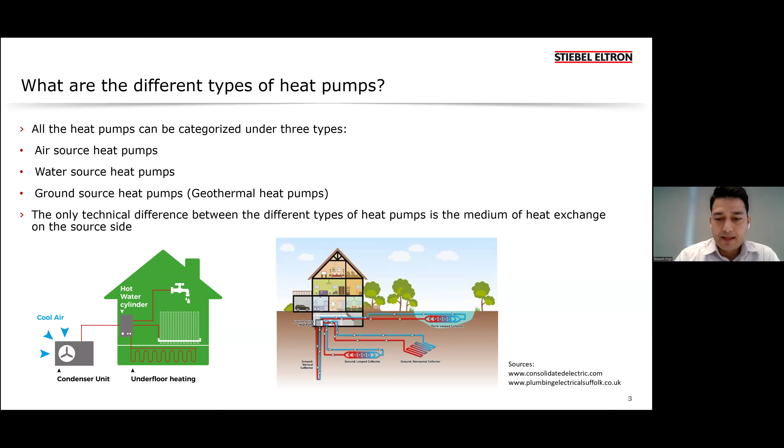That's only the technical difference between them. The refrigerant cycle, we'll talk about it a bit later, is exactly the same, and those are the only differences.

So the most common heat pump we see, including our high wall heat pump, famous in New Zealand, or hot water heat pumps, these are all types of air sourced heat pumps. These air source heat pumps basically come in two designs: one we call a monoblock heat pump, and the other is called a split heat pump.

So the monoblock heat pump is a heat pump where we've got all the components, we'll talk about the different components a bit later, all in one body. It's basically comprised in one body, hence the name monoblock system.

And a split system, as the name suggests, is split, so those components are split into different parts. If you imagine a high wall heat pump that most of you probably have in your homes, in a lounge or bedroom, those have two components. One part is outside, that's the fan unit, the compressor, and the evaporator. There's a refrigerant line running between the outdoor unit and the indoor unit. The indoor part, the fan coil part, blows out hot or cold air - that is the condenser. So it's basically split between inside and outside, hence the name split units.

Of course, it offers flexibility, so you can actually place that indoor unit wherever you want. But of course, you need a refrigeration professional to install that system. So in air source heat pumps, there are two types: monoblock and split systems.

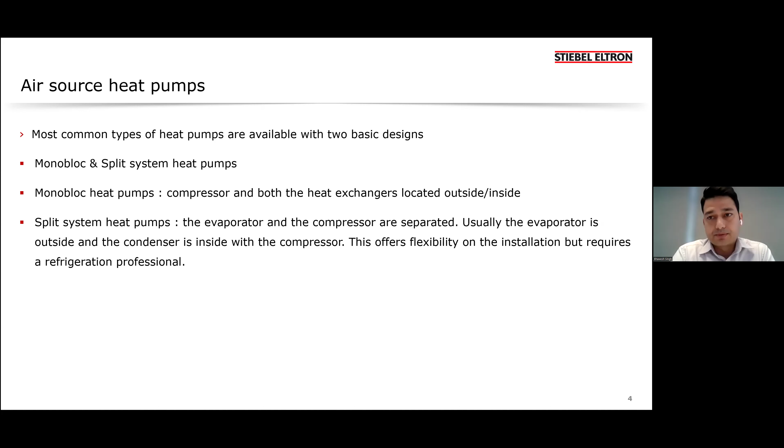Moving on with the heat pump - so what is actually a heat pump? As the name suggests, a heat pump is actually a pump.

It's a pump that moves environmental energy from one place to another. So in this case, it basically moves the heat rather than creating it. As we know from thermodynamics, you cannot create energy nor destroy it - you're basically moving it from one place to another. What the heat pump does is move the energy counter to the direction of normal flow. Normally energy moves from warm to cold, so in this case the heat pump does work to move the energy counter, from cold to hot - moving from cold outdoors in winter, to move the heat inside the house.

It's named pump because most heat pumps also have what we call the reversing valve, so you can use that in summer for a cooling mode. The same heat pump works in winter for heating, and with the reversing valve, we can use that heat pump to switch to cooling in summer. Most heat pumps work over a range of temperatures, anywhere between -20 and +40 degrees, which makes them useful in most parts of the world.

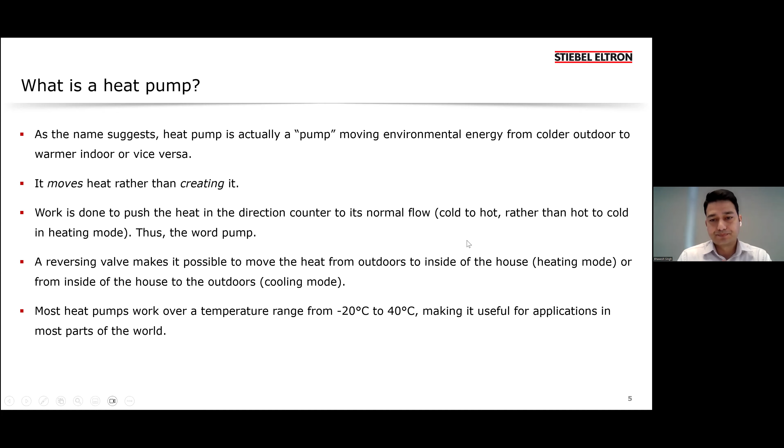So how does the heat pump work? A heat pump is nothing more than a refrigerator, actually - it works exactly like a refrigerator. As a matter of fact, refrigerators and air conditioners are examples of heat pumps just running in cooling mode. If you imagine a refrigerator, you've got your food inside. The refrigerant cycle extracts energy from that food, thereby cooling it down, and dumps it at the back of the refrigerator. You've got a little fan at the back of the refrigerator, which is warmer than the inside, so it basically gets the energy from inside and dumps it at the back.

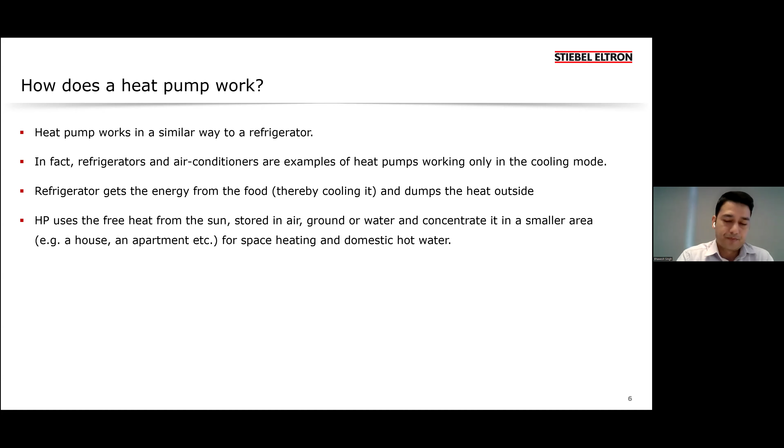So the heat pump basically uses the free heat from the sun, which is stored in air, ground, or water, and concentrates it in a smaller area - the apartment or house - for space heating and domestic hot water. So that's a little bit about heat pumps.

This could be a bit technical, but I'll try my best to explain it to you. This is the main part of the heat pump - as you can see, there are four components: the evaporator, compressor, condenser, and expansion valve. It's basically a hermetically sealed cycle.

Inside this hermetically sealed cycle, what we have is refrigerant flowing. This refrigerant has one really special characteristic: it boils at extremely low temperature. For example, we know water boils at 100 degrees Celsius. We've got refrigerant like R134A in some of our hot water heat pumps that boil at -26 degrees, and we've got 410A, which boils at -48 degrees, so extremely low boiling point.

So what then happens is any temperature we get here, especially in New Zealand, even Queenstown, if -6 degrees comes here, the refrigerant starts boiling. As the refrigerant boils, it makes its way to the compressor, which gets the evaporated or vapor refrigerant and compresses it, thereby increasing the pressure and temperature.

So then that hot gas goes into the condenser, where we have colder water coming from one side, and that becomes way hot on the way out. That can be used for heating systems, potable hot water heating, pool heating, spa heating, anything you want. So that energy is given out here, and then the refrigerant makes its way to the expansion valve.

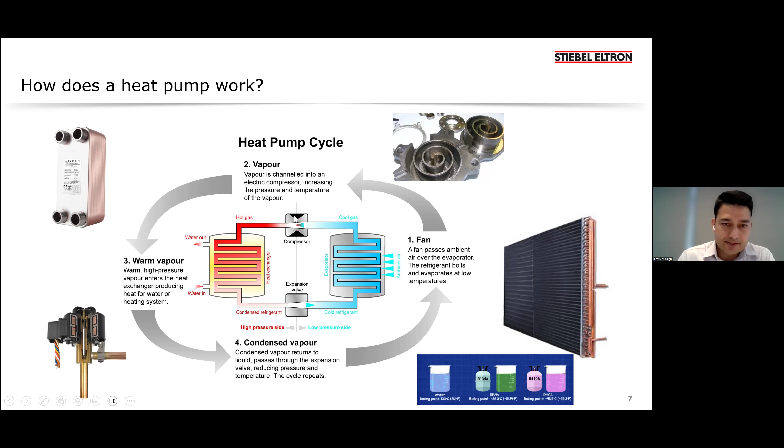So if you look at it that way, why is it that the heat pump is so efficient? You can see that most of the energy we receive from air, groundwater, or ground is about 75 to 80% energy. That's basically quote unquote free energy for us, and only about 20 to 25% is required for electricity.

The good thing is you can actually even produce that or part of that electricity yourself with solar PV or wind turbine or the rest of it. So you've got about 75 to 80% of the environmental energy, plus 20 to 25% of the electrical energy, to make into 100% heating system.

So if you calculate the coefficient of performance, or COP, the efficiency of the heat pump is the heat output given out here, 100%, divided by the work input, how much you put in here, 25%, which gives you your COP of 4, or 400% more efficient than just using an electrical element.

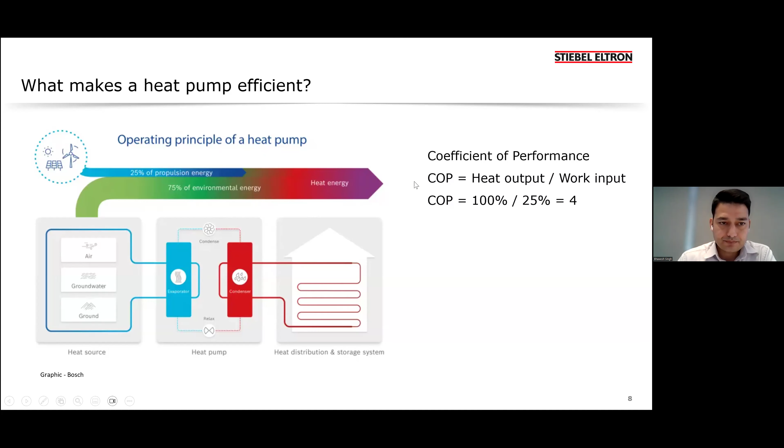So the heat pump, as briefly mentioned before, can be used in summer for cooling. That means it just changes the evaporator and condenser parts. You're basically extracting the energy from your indoors, thereby cooling it down, and dumping the energy outside. In winter, it extracts the energy from the ambient air and dumps it inside, thereby heating the house. The same heat pump can be reversed to heat and cool the space.

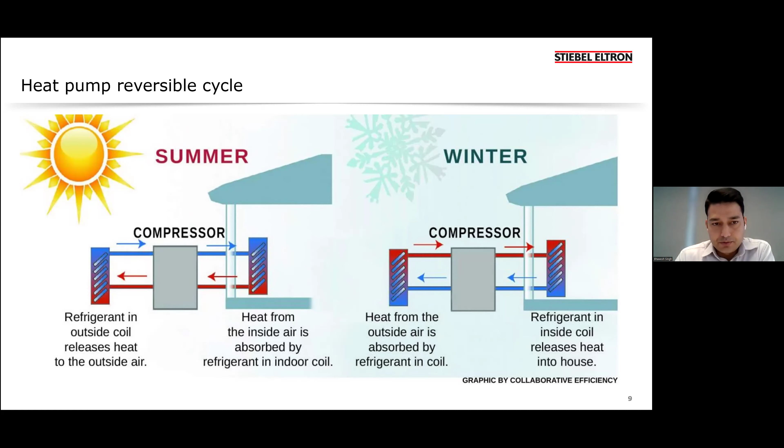A slight product overview of heat pumps that we have and that can be used. So three heat pumps on the left - you can see those heat pumps can be used for space heating, hot water heating, pool heating, spa heating, depending on the size of your building.

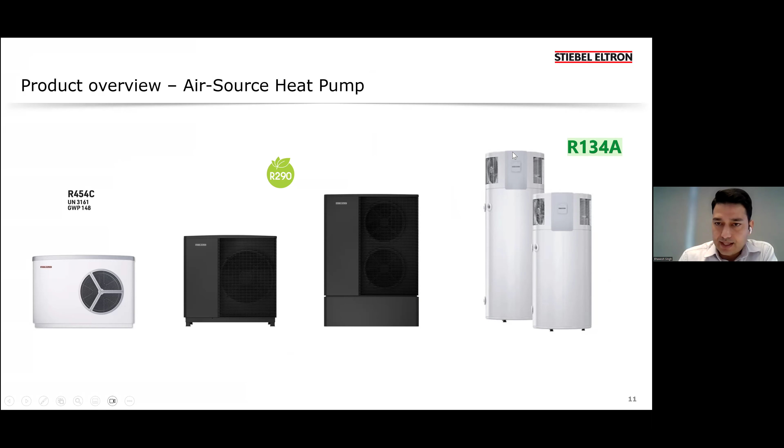And these ones here are just hot water heat pumps. You can see here a hot water cylinder with the heat pump on top, which has got a really smaller compressor of only about 500 watt. Hence it's quite efficient, and that basically heats up the tank to produce potable hot water.

We also have ground source heat pumps, basically similar size. We don't need a fan here because we're extracting the energy from the ground source or water source, in the size of 4 kilowatt to 90 kilowatt for residential purposes and semi-commercial purposes.

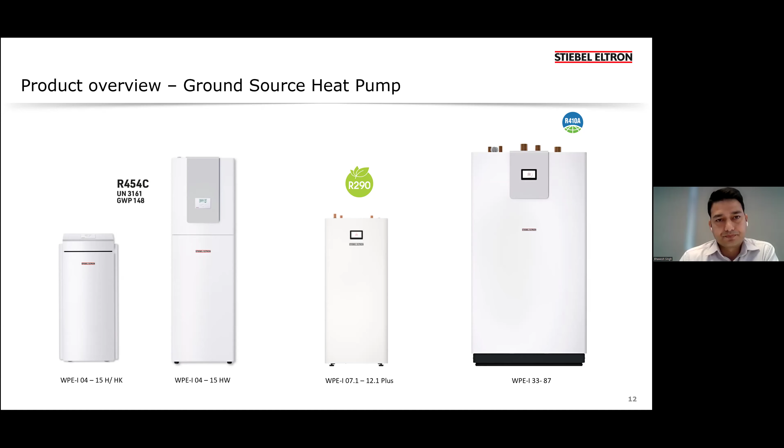The application areas of the heat pump, as you might have guessed, we basically produce hot water, and that hot water can be used in most cases - for example, for underfloor heating systems, for radiator systems, to produce your potable hot water, to heat the swimming pool and spa.

You can actually even reverse the cycle, as you've learned, to utilize it for passive cooling. So you've got your underfloor heating anyway, so you can introduce cooler water in summer to avoid the house from overheating or even slightly cool down the house. And also you can use active cooling via fan coil systems to cool the house.

And the good thing about it is that the heat pump also connects to solar PV. So mostly in summer, when you're producing electricity when the sun is out, you can actually run the heat pump to cool down the house or produce hot water. It's quite a cool concept.

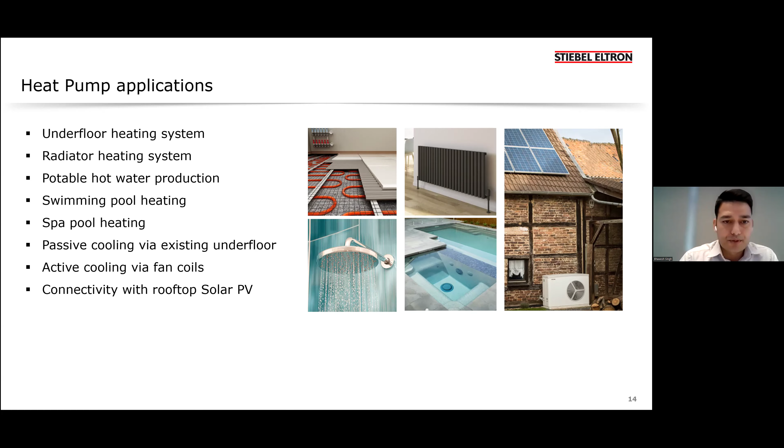So we've got a bit of a scenario analysis I did a couple of years back. What I wanted to see when I came to New Zealand was how much energy could we save by implementing heat pumps and replacing existing electrical hot water cylinders or gas hot water systems we might have at home. So what would be the energy savings we could make, and how can we use this? That was my thought.

I've always heard that New Zealand has a really green national grid, with electricity production over 85% renewable, which is awesome. But there are also a couple of things we probably need to know before we call ourselves a really green country. So I fished out some information from the MBIE website and made this report out of it.

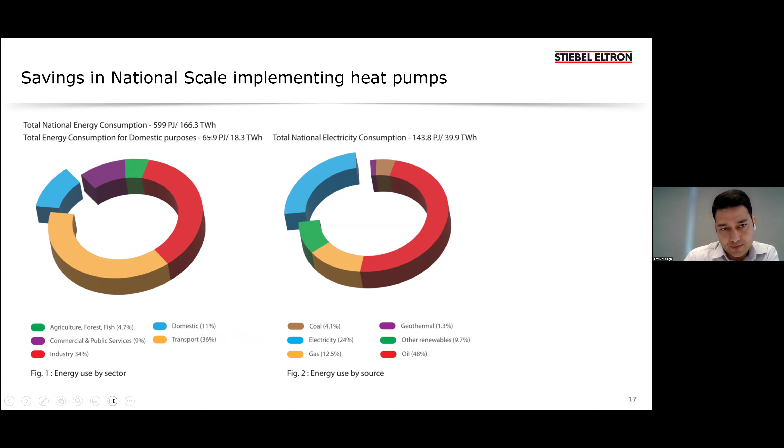Now if you look at energy by source, how do we get our energy? We're proud that our electricity grid is 85% renewable, but that 85% is actually only about 24% of the total energy we use. Most of the energy we use as a country is oil, because we're transport heavy - about 36% transport. So we use 48% oil, 12.5% gas, that's about 60% plus fossil fuels. We've got some renewables, but in electricity it's about 24%. So out of 167 terawatt hours total, we're talking about almost 40 terawatt hours of electricity consumed as a country.

Now let's break that down by sector - how much electricity is used in each sector? Most electricity is used in residential, 32%, with 24% in commercial, and the rest in other industries. So that roughly 32% of electricity is about 12.7 terawatt hours used in residential. Out of that 12.7 terawatt hours, electricity is used for space heating - your heat pumps, panel heaters - refrigeration, and hot water at 29%. So 29% of that 12.7 terawatt hours, which is 5.3 terawatt hours, is used to produce hot water.

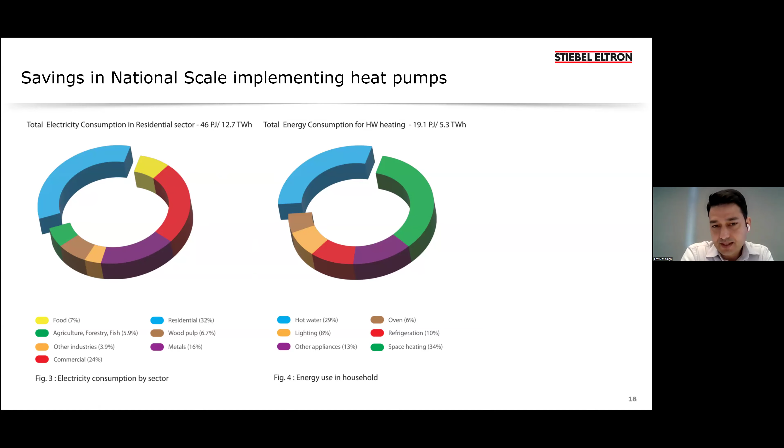And I thought, okay, what could we do if we made this hot water production very efficient? How much would we save? So that's one part of the report, and the second part is I also wanted to combine these two parts.

I wanted to look at the fleet of vehicles we have in New Zealand. The cars you and I ride every day, the light passenger vehicles or LPV cars - we've got about 3.4 million of those for 5.5 million people. That includes about 38,000, probably now 42,000 EVs. So those 3.4 million LPVs cover about 33 billion kilometers a year.

So we travel 33 billion combined kilometers in a year in New Zealand. If you look at that 33 billion kilometers and see how much CO2 that actually emits, it's about 7.1 million ton of CO2 that we emit just with our passenger vehicles.

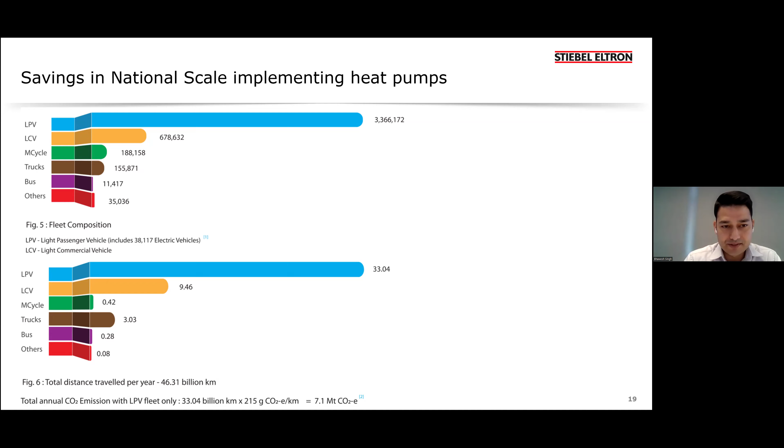So my idea was, if we could replace the electric hot water cylinders with hot water heat pumps—of course a fictive scenario, but if we could replace all of it, how much energy would we save? We know hot water uses quite a lot of energy, about 29% of the total energy required in households.

If you replace those electric hot water cylinders and gas califonts with hot water heat pumps, the savings would be about 2.7 terawatt hours of electricity per year, or about 7% of total electricity generated in New Zealand. That electricity would support about 1.4 million EVs without needing to produce any more electricity.

No dams, no Lake Onslow, no more wind turbines or solar farms needed—though of course you could still do that. But we could support so many EVs, 1.4 plus million, without producing any more power. That would replace about 14 billion kilometers of travel out of the 33 billion, just by saving that electricity and replacing old technology with newer.

That was quite an eye opener for me. I ran that past a couple of engineers at EECA and some other sharp-brained people, and they probably approved of it. It is quite a lot of savings that we can make here.

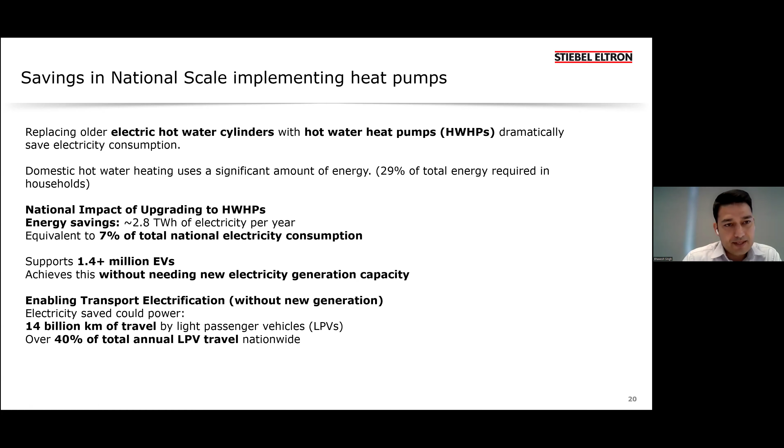And lastly, out of that 7.1 million ton of carbon dioxide we normally emit into the atmosphere, 3 million could be saved if we can run EVs. That 3 million is about equivalent to running a 500 megawatt coal-fired power plant—Huntly, for example, is only 953 megawatts. So it is quite a lot of CO2 you can save.

If we don't meet our carbon goals as a country, we'd have to purchase international carbon credits to offset our emissions. These are the carbon credits we need to pay depending on where we are. If you're complying with the Paris Agreement, it's about $20 US per ton of carbon dioxide. For 3 million tons, that's about 60 million US, which is about 106 million New Zealand dollars.

And that's basically each year. That would fully subsidize installation of 13,000 hot water heat pumps, or partially subsidize 26,000 or more. You can keep building on that, and you can keep the money in New Zealand instead of sending it offshore.

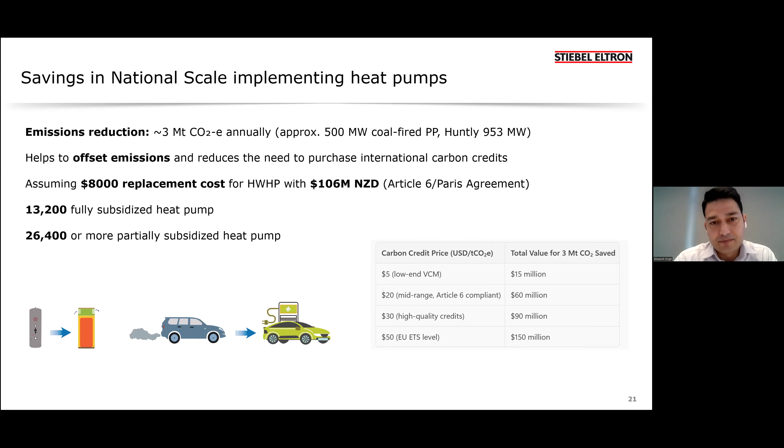I thought that was quite a good idea. The amount of savings you can make through it was just mind-blowing for me. I wanted to show that—it might look really nice, just a small backup unit in your backyard. The heat pump might look pretty simple, but it has quite a lot of potential if we implement it in a bigger market. That's what I wanted to show here.

And that's it from me. Any questions you can probably ask now or later, whenever you feel comfortable.

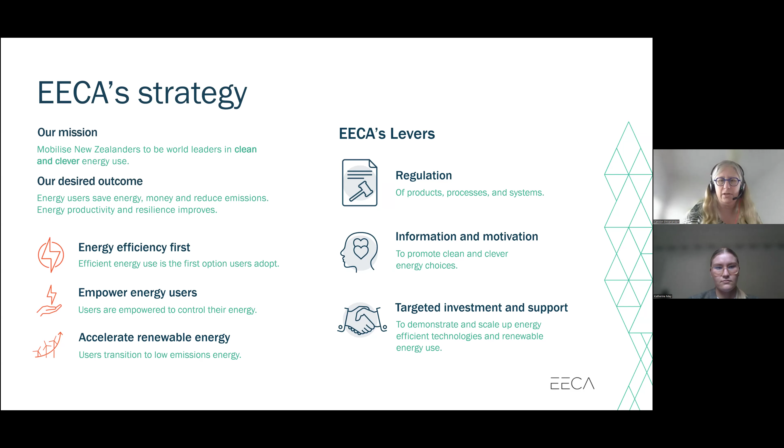So we're interested in what the barriers are to that. Is it about capital costs? Is it about awareness? Is it about installer training? There's also limited real-world performance data, particularly in low temperature conditions like we have in New Zealand in winter. So there's a few things we're wondering about - what are the barriers, what are the gaps, what can we do?

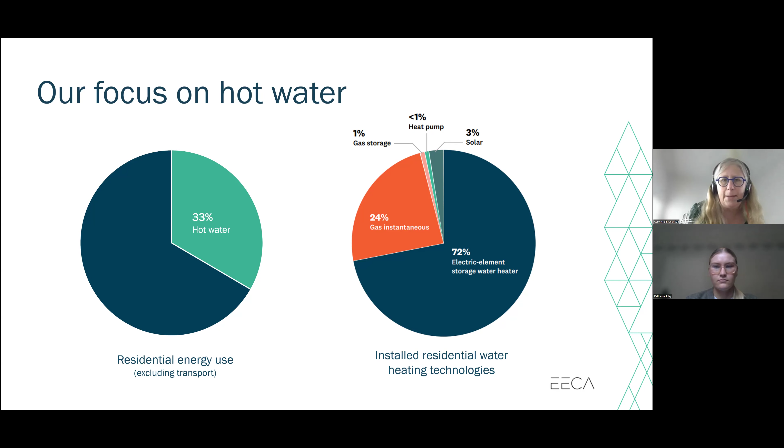We are wondering if maybe there are some barriers around the people who are purchasing or specifying these - builders, landlords, specifiers of various sorts - they're not the ones paying the ongoing running costs of these products. So maybe there's a barrier there. Those are all questions we are interested in finding out more about.

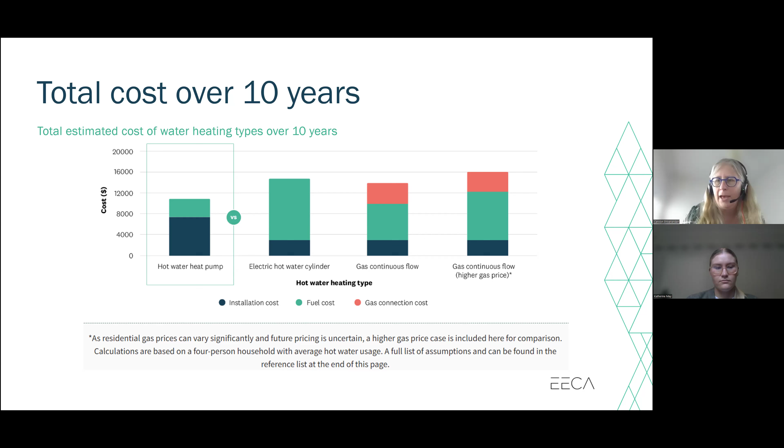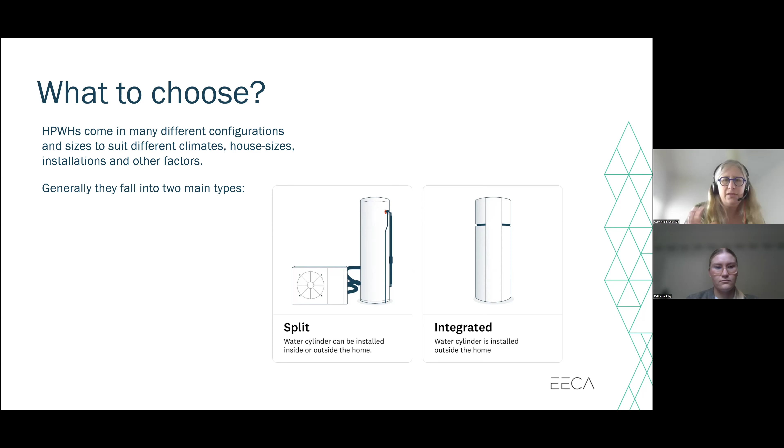The other thing is, what to choose? There seems to be a wide range of products on the market - split systems, integrated systems, different sizes, different configurations, different types of installation. We wanted to understand more about how different types perform and what was suitable for different scenarios. All of this led us to the research project we're working on now. I'll hand over to Catherine to run us through exactly what we're looking at and what we've found so far. Thanks, Carolyn.

As Carolyn mentioned, we're undertaking a research project to understand more about the performance of heat pump water heaters in general, how different products compare to each other across the different types, and how the technology functions in different climate zones and household types. We've installed about 80 products in homes across the country, and we're going to monitor them for about 12 months to see how they go.

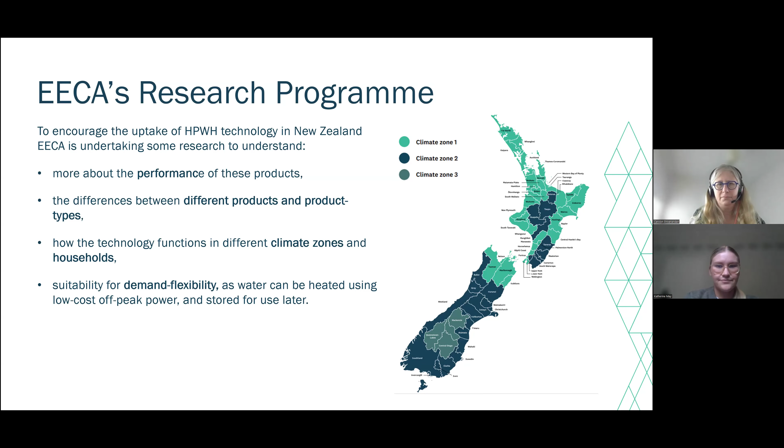We've got some good insights from the program so far, and we're sharing things as we go. In May, we published our first report under the program, which summarizes findings from a market scan we did in late 2024.

That report covers insights on available products and claimed performance, which we'll of course test, and also the importers and manufacturers in New Zealand. We found that while the market share of heat pump water heaters is quite low, there's quite a few importers and manufacturers in the country.

There's at least 18 importers and manufacturers, and across them there's about 40 different models of heat pump water heaters available. We also found that the main barriers to uptake are capital costs, consumer awareness, and installer awareness and training.

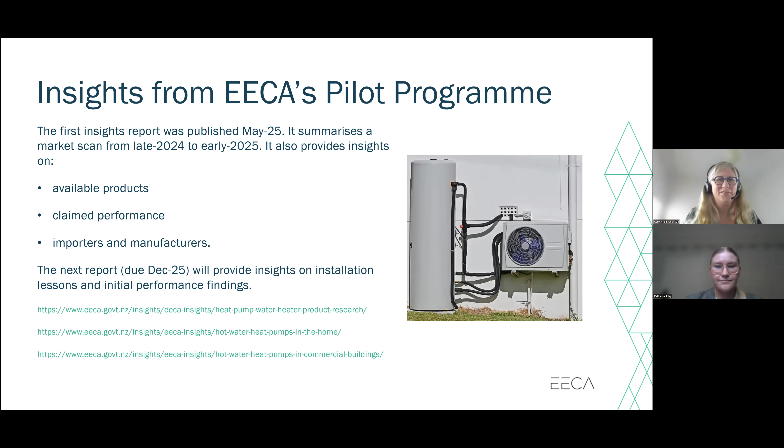All of our products have been installed now, and we've started some analysis on the data we're getting in. We are publishing an interim findings report in the next month or so, so keep an eye out for that.

In terms of some initial high-level insights, we found that costs varied quite widely. The product costs ranged from $1,900 all the way up to nearly $8,000. For installation, that ranged from $1,600 up to nearly $10,000.

That's impacted quite a lot by the complexity of the installation. Depending on how much building or additional plumbing work was required in that specific situation, we saw quite a fluctuation in costs.

We also found that installation quality is really important. Correct sizing of the tank - in some cases where that wasn't done properly, that affected the hot water service for the household. We also came across the fact that there's quite a few additional considerations for low pressure changeovers.

Things like considering increased water flow and the impact that might have on existing piping. The other thing we had a lot of feedback on was noise - quite a few people found the units were quite noisy.

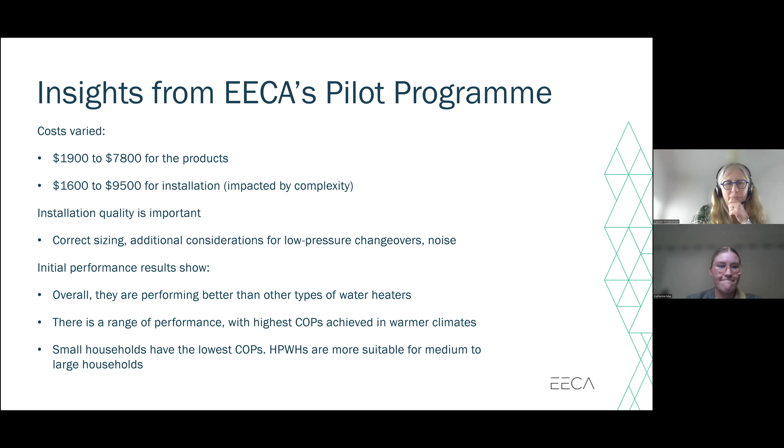I don't actually think they're any more noisy than a space heating heat pump. It's just people are not used to them, so they don't really think about it until they get the product in, and then they're like, oh, it's making a heat pump noise.

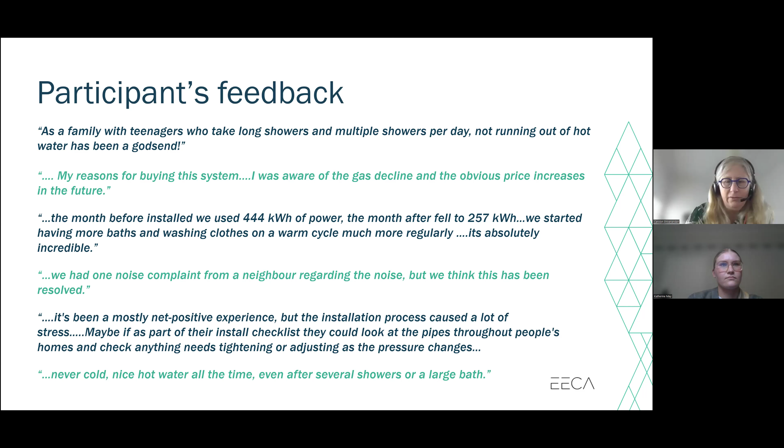The comment below was about a bit of an issue with installation. I think they were coming off a low pressure system, so there were some little bits and pieces that were problematic there.

I also wanted to give a bit of a plug for the heat pump water heater installer's guide. As an offshoot from this project, we developed an installer's guide for heat pump water heaters. This is a sister document to a similar space heating heat pump installer's guide we commissioned many years ago, which was really successful. It came out when space heating heat pumps were a new product in New Zealand's market. So we're hoping this will also be helpful at this stage for heat pump water heaters, and it's really aimed at professional installers.

It was developed using a technical reference group, which included various industry associations. It covers a little bit about how they work, the climate and sizing considerations, how you need to think about household size and climate when selecting a product for someone, a little bit about refrigerants, pipe work, plumbing, and also how to support homeowners to get the best out of this kind of product.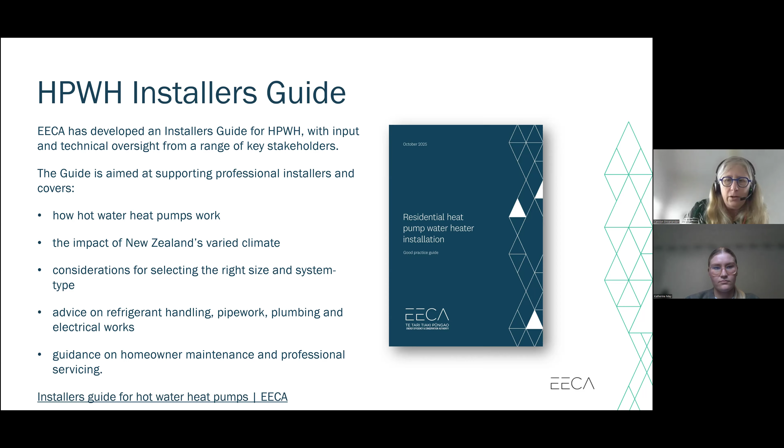Awesome, thank you very much Carolyn and Catherine, that was really interesting. I've got some nice technical questions for you when we get to the Q&A from Jason, so I look forward to that. Yes, but no, that's really, really good to have those resources as well. Thank you very much, Lee and Eddie, for putting those links in the chat as well. Beautiful, okay, so we're going to crack on with our last speaker now. Jason, I'll just hand straight into you, mate. Fair enough, I'll see what I can do.

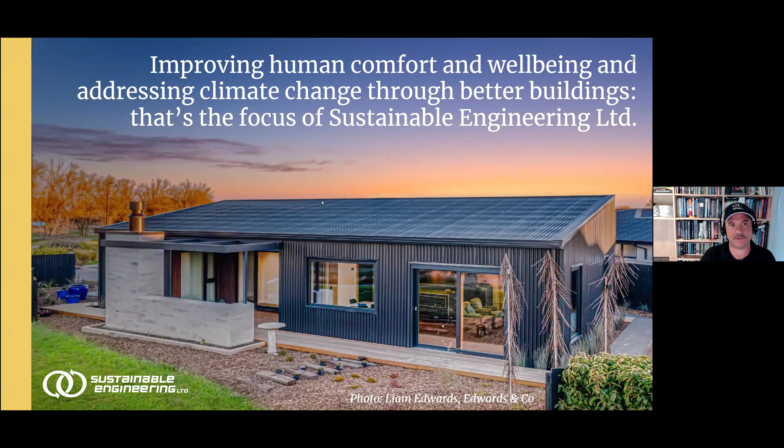Some people think the heat pump focus on PHPP is a bit over the top, but it's really quite important why we put effort like this into heat pumps, because the Passive House Planning Package is a design tool. The whole point is so you, as an architect or designer who isn't a building scientist who loves Energy Plus or detailed computer modeling, can design a building that performs really well. You can design for comfort and energy efficiency because you can understand how the stuff works. So the Passive House Planning Package is a design tool.

So putting a Shaq-size heat pump in a Jimmy Fallon kind of size house, which is what a Passive House is a lot of times, is a bad idea. If you do that, you'll see that the COP in your PHPP package, if you've modeled the heat pump correctly, will show really crappy COPs, well below 1 in a lot of cases, because the heat pump's much too big for the way the Passive House Planning Package assumes you're going to run the house.

We'll get into that a little bit. The point of modeling the heat pumps in such detail in PHPP, and it's actually quite crude modeling to a good level, is to allow you to see what's going on and make it better.

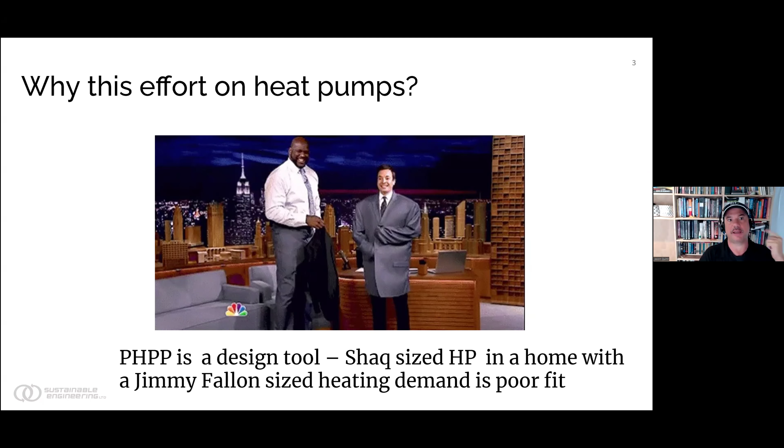This is a normal - it could be an electric cylinder, but it's actually a heat pump hot water cylinder from Stiebel Eltron that would sit outside or in your garage, generating hot water by pumping energy from the outdoor air into the heat pump, and then water comes out.

It's not uncommon in many certified passive house or even just Passive House performance level homes to have the master suite, bathroom, and kitchen in one spot, and then the ensuite way over on the other side of the building. When that happens, people designing for comfort and luxury will often put a recirculation loop in. In PHPP, if you model it properly, you'll see that hot water heat pump cylinder system, with that recirculation loop, has a COP of like 0.1 or even less, because so much heat is being lost from that circulation loop.

So you can be a clever designer, and this schematic enables that clever design. It has a recirculation pump that returns hot water from the fixtures back, but it only runs on demand. You have a light sensor in the bathroom, say in the remote ensuite. When they step in, the pump comes on. So when they turn the tap on, they have instant hot water, but the loop's not running except when they're in the ensuite, and the water coming back to the pump is cold. So there's clever ways to design things.

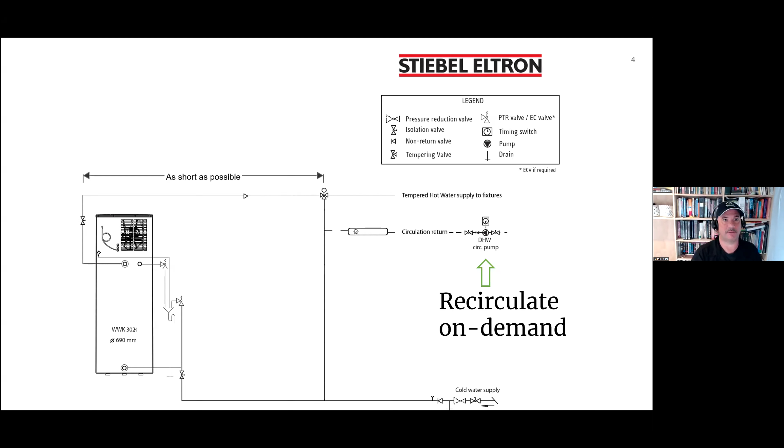We can't certify it if we leave this in there, so we're going to take the pump out. I've had to get photos of some very sad builder with the pump torn out and a piece put in, holding his old circulation loop pump that somebody paid a lot of money for and doesn't get to use. That means now they have a long wait to get water to that remote shower. They don't get the recirculation pump benefit, but they paid for it, because they're trying to reduce energy. So I encourage us to think about that.

There's benefits, right. The other thing to think about is this is what we mean when we speak of things, they have very discrete technical meanings. So when Stiebel Eltron, or EECA in this case, talks about the COP of a heat pump for a hot water cylinder, where they're measuring that COP really, and exactly how they measure it, is super important.

That's why we have good engineering standards in New Zealand that allow you to compare one heat pump hot water heater against another, or an electric cylinder, or domestic gas, whatever. But those standards are written by committees, and I'd say they perhaps end up with higher COPs than you'd have in practice. The way they do that is they have a large water draw. In this picture, swiped from the Stiebel Eltron site with their permission, they measure the COP for this cylinder basically at the hot and cold water taps.

So basically how much hot water is provided, how cold the cold water going in is, and it's like the whole tank - the tank losses are lumped in there, the usage of hot water, that energy is counted towards the COP. So that COP number you see on a brochure for a monoblock heat pump water cylinder from Stiebel Eltron, and from any other supplier actually, has all this stuff lumped together.

But in PHPP, we want to break this apart. So you can specify a better insulated tank, or say this household is a low demand household with very few people in it, so there's a very low water draw because you only have one occupant in this little house. So the COP of the system will move around in reality, and PHPP, because it's attempting to predict reality accurately, not just be a code compliance tool, is trying to mimic that. So you need all the pieces, and we'll take a look at that in just a sec.

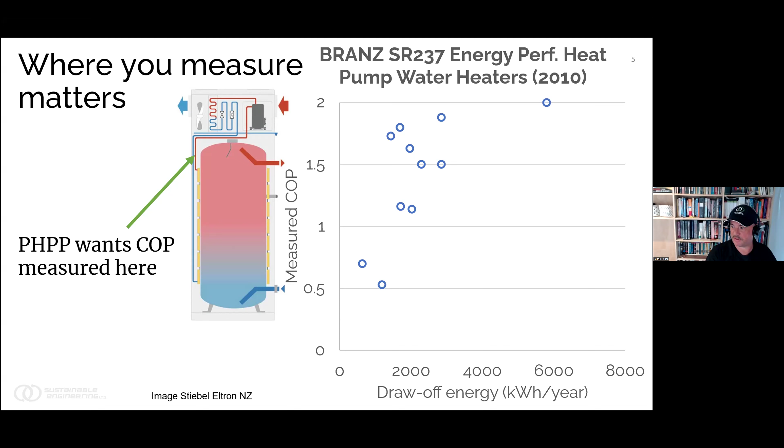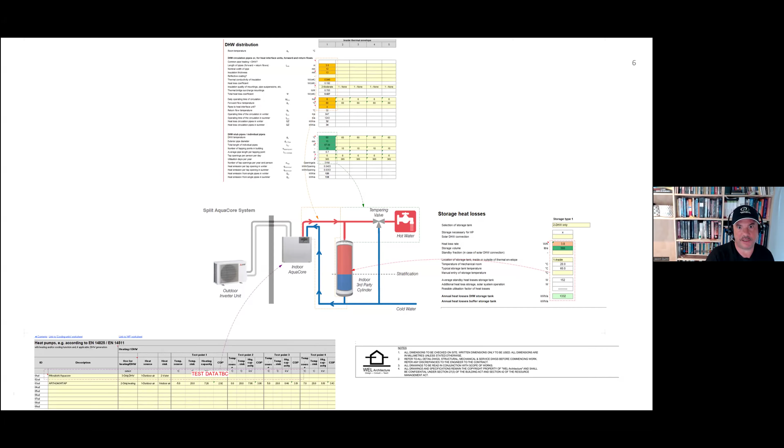Like, does it make sense to super insulate this pipe work? Yeah, you'll find out that's super important. You need to know what's the circulation loop time typically used by this pump to put it in as well. So the reason it's complex for heat pumps in PHPP is because they can be complex systems, and this is a particularly complex one.

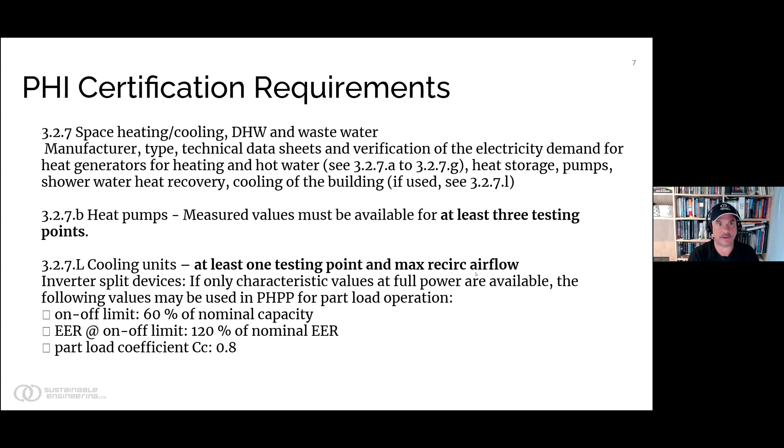In PHPP's plan package, there's 3 types of heat pumps it can handle. First, compact units in the component sheet - basically the Nilan P, which has a hot water cylinder and a heat pump integrated that goes inside the building, plus an MVHR all in one. It doesn't have any external heat pump bits; they're all inside the MVHR. It basically sucks heat out of the exhaust duct before it leaves the building and uses that to heat the hot water and potentially the building.

The next ones are combined ventilation and split systems, but only with PHI specified data. So if you're going to use that portion of PHPP, make sure it's only good with data from PHI.

Finally, where you'll put everything for every pump where you put data in yourself is the section for heat pumps according to EN 14825 and 14511. Those standards are strictly only applicable to heat pumps used for heating - so you generate hot water or hot air with a split system. But they can technically be used for anything if you've backed out numbers that make sense.

For a monoblock hot water cylinder, we need some way to generate the heat pump data for just the monoblock - the heat pump in the top of the unit - not including the tank losses and the piping losses, because that's modeled elsewhere in PHPP. Which is why it gets complicated.

This section can technically handle sources of outdoor air, ground source, as well as a ground sheet if you want to do ground source heat pumps. And for dumping the heat into the building, you can dump it either to air or into water.

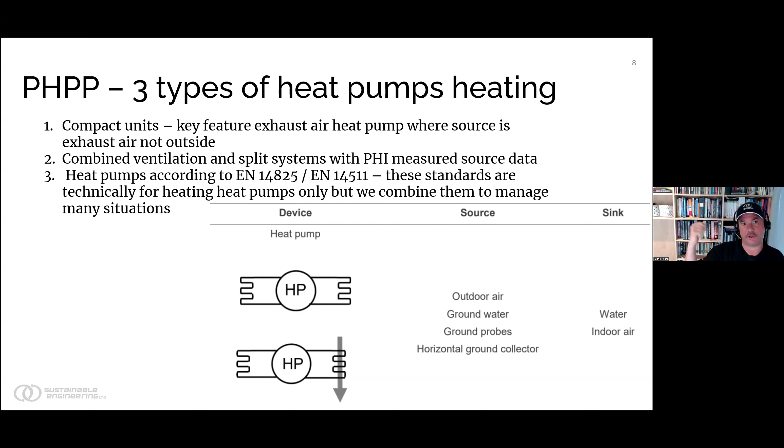I've got all these resources - I'll make sure these slides are available at some point, but they're all online. Basically, we'll talk through 3 different tools in just a minute so you can see how they work, and then we'll get into it.

In PHPP, there's the heat pump data requirement, which goes on the component sheet. You basically give it a name, which can be anything - a text field - and then start entering data.

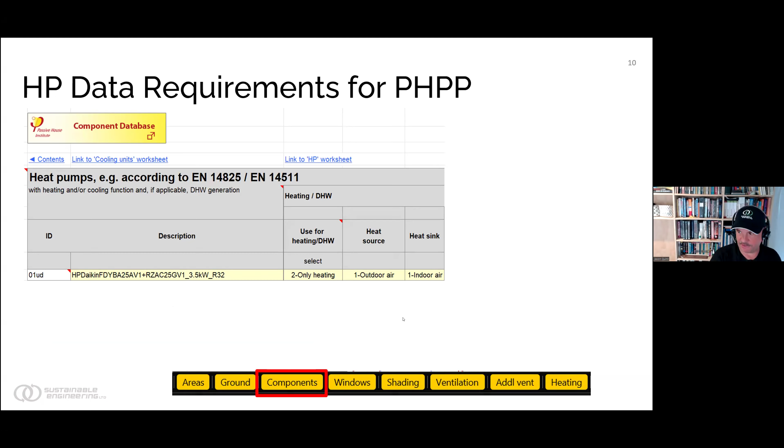There's also this heat pump tool available from PHI called the heat pump tool, which was designed for Europe and America, so it's built around those standards. If you have a heat pump built and shipped to those markets, you can put in just a couple numbers - basically the seasonal COP for heating and for cooling, and some size numbers, capacity numbers - and that'll spit out all the data you need.

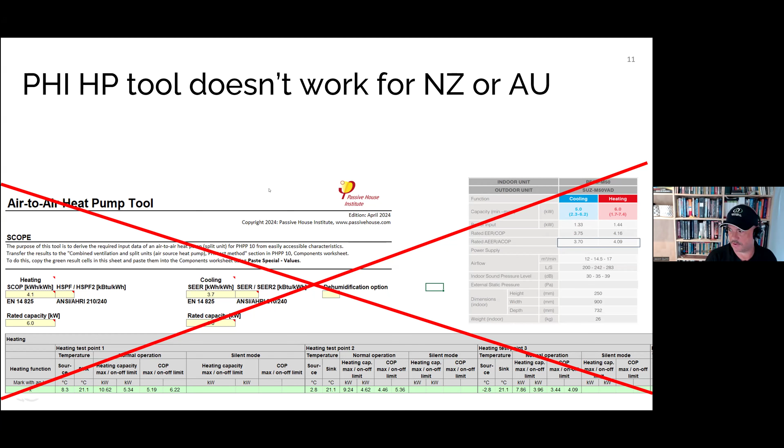Unfortunately, in New Zealand, we do not have heat pumps, either for hot water or for heating and cooling, that are designed to these standards. Even the ones that are the same model sold in Europe tend to have different software and different coolant loads put in them to come here. The manufacturers told us they're just not equivalent, so you can't use the PHI heat pump tool, which is a shame because it works quite well. Unfortunately it gives you data that's just bogus.

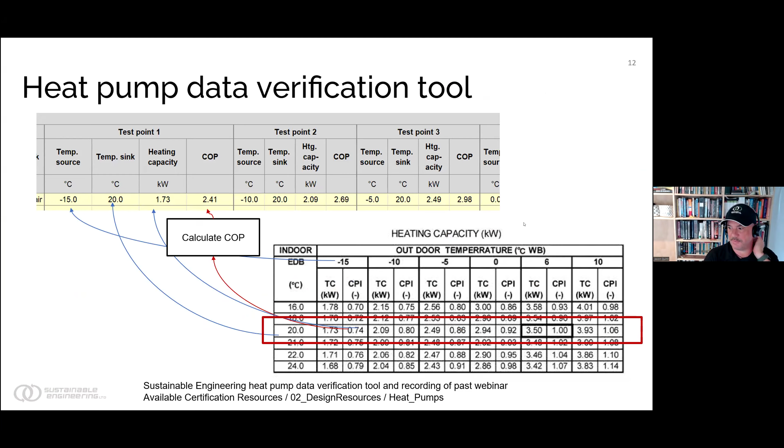So the way we talked about 5 months ago when we did the last heat pump webinar for PHINZ is basically you get the technical manuals and put the data into this verification tool we've made. We've got a heat pump data verification tool so you can put the data in and check it easily. It plots the data, like PHPP plots the data for you, so you can see that the data makes sense and how to check it.

We've also got another tool we've built, which is this thing we call the MEPS tool. Folks may not realize this, but in order to sell a heating and cooling split system heat pump here in New Zealand, you need to put data into this database called MEPS - that's New Zealand and Australia, because we're a unified market. That MEPS database, which is available publicly as a CSV file, has a lot of data in it.

So we've built a tool that looks like this, and basically, if the heat pump's in there and has enough data, it has 3 heating test points and 1 cooling test point, then it'll show up in this drop-down list, which I'll pull up this sheet and show you how it works in a sec. You can just basically pick it, the data comes up, and you can cut and paste the data into PHPP. We'll do that live in just a sec. I'm showing you this in case the live demo doesn't work, because shit always goes wrong, right?

So this sheet here is designed to be printed as a PDF. Ideally what you would do is pick your heat pump, hit it in, put the data in PHPP, and then print this just to a PDF and submit it with your certification. So then you're done in just a couple minutes, right? Which is the goal, because then the heat pump data is in the PHPP correctly, so you can see what sizing impacts have, and you're done quick, efficiently. It doesn't take a lot of time.

Unfortunately, it doesn't cover hot water heat pumps. I'll see if Stiebel Eltron and a few other vendors can perhaps work to put the data in another sheet for us. This is embedded in the MEPS sheet. We don't need to go through all this, but basically it takes this previous page, which is the PDF, and just says, well, this number goes here on the components database sheet. This number goes here, just where they go. So it's really straightforward. I think it's easiest to do things correctly once.

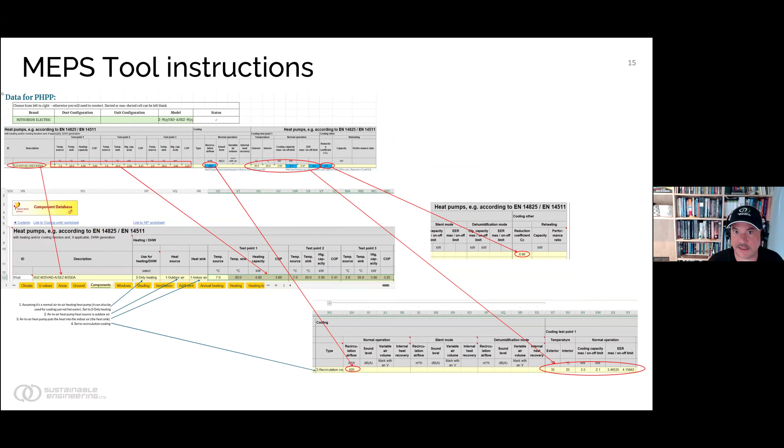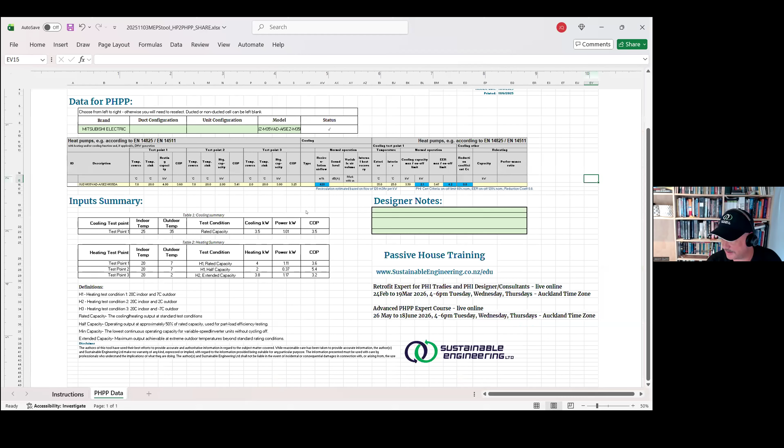So let me show you what that MEPS database looks like. MEPS tool, this one, right? So this is what the Excel tool looks like. If I shrink it a bit, I can make it fit on the screen. So this is the MEPS tool. That's a PDF page, and there's the instruction page, which we won't look at. Oh, actually, I guess we should look at this as well. I'll make it a bit bigger so we can see what's going on up over here.

So this is just a way to search the database. There's 3,687 heat pumps in here that you can just pull the data in. It'll be the right format. I think there's like 4,500 in the total database, so most of them have enough data to qualify for this tool.

Oh, I should point out that the tool is crap. Like, it doesn't actually do anything magical. It just takes the MEPS data, checks it to make sure there's enough data for the heat pump you want, and puts it in the right format. It does, and it's the least amount of data you're allowed to use for certification, so it just meets the criteria.

I sent a copy to Dr. Jürgen Schnieders, who's kind of like the godfather of PHPP in Germany. He's also the head of certification services at PHI, and he's fine with it. He's like, yeah, it's about as good as you can do with what you've got available, unless you can get full test data.

So anyways, in here, what you do is you can put in a size, like if you change this to 1 for the minimum heating, then you just basically grab the brand. Stiebel Eltron won't have any, but we'll switch to Daikin maybe, Fujitsu, right? And so you can see these are all the heat pumps available that fit in this cooling space. If you pick ducted or something, it'll show a fewer number. The key to remember here, and the reason I'm doing this live, is just remember, if you want everything, not ducted or non-ducted, just delete it, and then you'll get more.

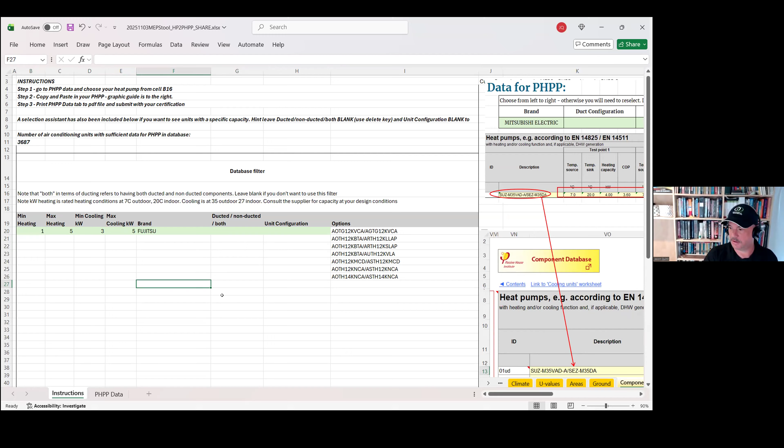All right, and this is the actual sheet you use. Making it bigger so we can look at the displays for a second. Basically, you just go up here and pick the brand you want. Let's pick Daikin in this case, just because they're not here. Then you've got to pick a model. These are all the models you can pick for Daikin. You can see there's a bazillion of them because nothing's listed. So you pick one and that's it, right?

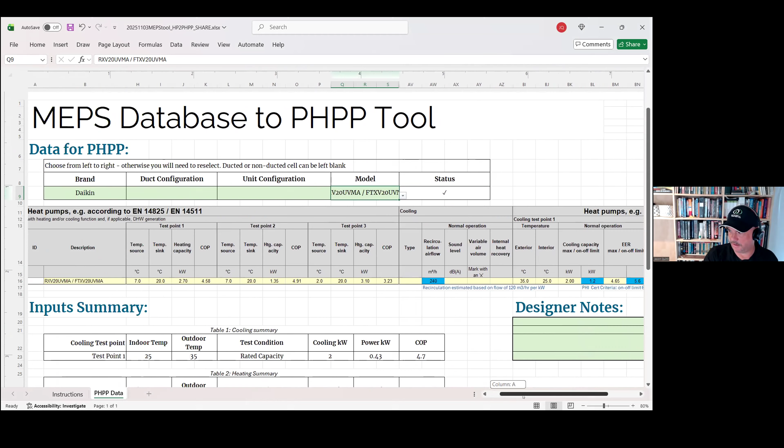Now all the data is here and you pretty much just cut and paste the data. The idea is you might put over here, like, I don't know, X project, my name is Joe, or whatever. Basically you can only edit these green fields - everything else should give you a warning message if you try to touch it. Then you just print this to a PDF, turn it in with certification, and you're done.

So at least the split air-to-air systems should be straightforward now because they've just been driving me nuts forever.

All right, in the last couple minutes I've got, I'm going to show you a couple other tools because I think that makes good sense. So let's do that.

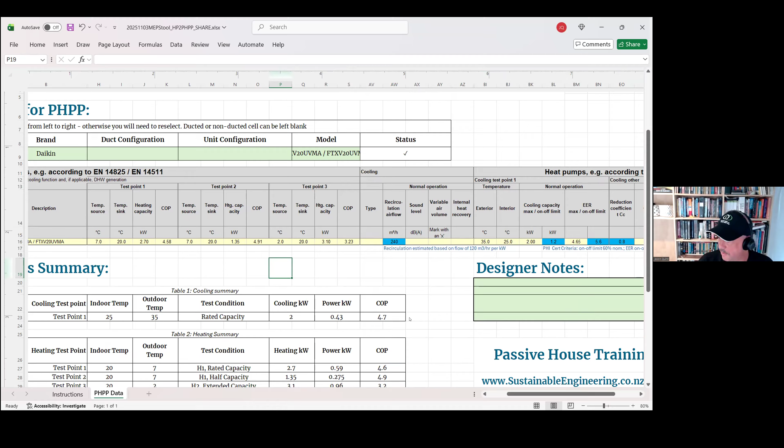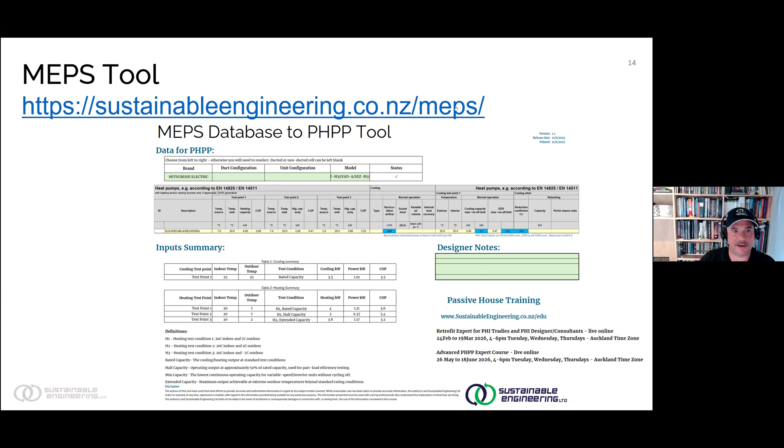So we've talked about the MEPS tool, which if you go to our website and just go to MEPS, it's available for free - you just click it and download it. There's no cost or anything. We're never going to charge for it because we didn't put any work into it - well, we haven't put much work into it anyways. I do ask that you try not to share the file; please just share the URL where it's at so you can download it again in case we fix it. That's about it really on the MEPS tool.

All right, so now we'll talk about the multi-heat pump tool. If you have multiple of the same type of air-to-air split system, like two high wall units in the house of the same model, you can just put two in PHPP - it's pretty straightforward, pretty easy. If you have two slightly different models and one's got a worse COP than the other, I'd be tempted to just put the worst one in and click two again, and put that as a justification when you submit certification.

But if you've got a building with a couple different ones, or a fairly complex VRF system, then you can use this tool PHI calls the multi-heat pump tool. It lets you do fairly complex heat pump installations. Basically what it does is compute an overall effective COP. So you actually have to have a PHPP done before you play with this tool, because it links to that PHPP file and looks at that building in that climate you designed, and says, with this array of heat pumps, what does the COP curve look like for that building.

So it's a relatively complicated tool, from somebody who loves PHPP and thinks it's quite straightforward - just be aware. I can give it to you, but only for specific projects. So if I'm going to work on this particular building with this thing, Jason, I need it, fine, I can send you the tool. But you can't have it to work on all future projects, because it's a beta tool and that's how PHI told me to hand it out. So that's what I'm doing. I won't get into any more than that. It's available - if you've got a complicated situation with multiple heat pumps and don't want to just use a conservative assumption to make it easy, then this is the tool to use.

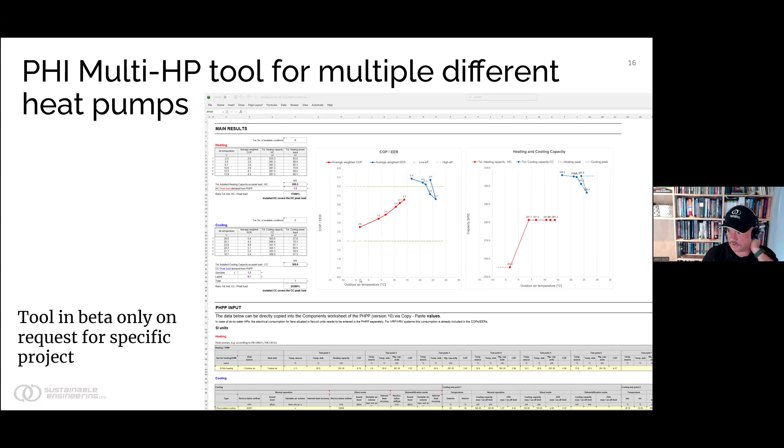All right, I do want to point out a couple more things and then I'll finish. Once you've got a heat pump selected, do realize that zonal heating and cooling loads can cause some comfort complaints for clients. So if you've got a single high wall unit in the lounge, you can cool the lounge, but remember the MVHR will not distribute cooling - not at all.

PHI's kind of rule of thumb is there's a one-door rule. It's not really a rule, but roughly, if you've got a lounge with a bedroom that opens directly off the lounge, the bedroom will get cooled by the lounge. If there's a hallway, a door to the hallway, and then a door to the bedroom, it's probably not going to get cooled by the lounge.

If it has lower glazing ratios, the lounge has most of the glass, that may be just fine. But if you've got a client like I typically do, where they'd like the bedroom being a degree or 2 cooler than the lounge in winter, and you've got your heat source in the lounge, the heat recovery system will recirculate some heat back to those bedrooms, but they may still need some point source. So realize that on more complex projects, or projects where the glazing ratios are quite different in different spaces, you probably need to think about doing zonal heating and cooling loads.

We can do that. A lot of those equipment suppliers have the ability to do that. They don't often do it unless you absolutely force them to, because it's not super quick. It's not terribly expensive, it's like 4 or 5 hours work on a typical building. But do realize that is something to do, especially if you're going to the expense of putting a ducted system in.

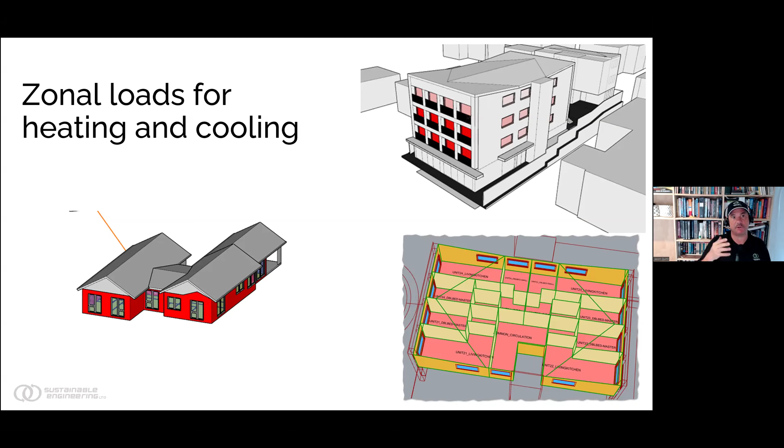The other thing I want to tell folks is that in Feb of next year, a lot of this heat pump stuff I've been doing, especially working with Steve Lautron, has been working on a retrofit book for New Zealand. A retrofit guide, which is being funded out of EECA, surprisingly enough, through NZGBC and then to us. As part of that, I've agreed to hold the retrofit expert course next year in Feb, the first time it'll be held in New Zealand and Australia. It'll be online live.

It's an odd class because it'll be half the class - 4 weeks in total, with the first 2 weeks for tradies and designers, and the last 2 weeks just for designers. So yeah, just wanted to let folks know about that.

Was there anything else? Nope.

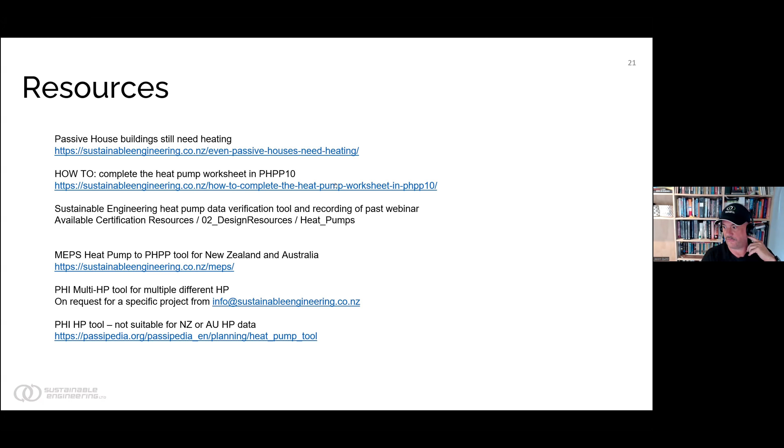And then just the resources slide, which has links to the MEPS tool and how you get the multi-heat pump tool if you need it. Pointing out again, the PHI tool is not terribly useful. And if you want to source the correct technical data, there's a lot of suppliers that provide it - you can put the full set of data into PHPP by hand, and that's diagrammed quite well at this location.